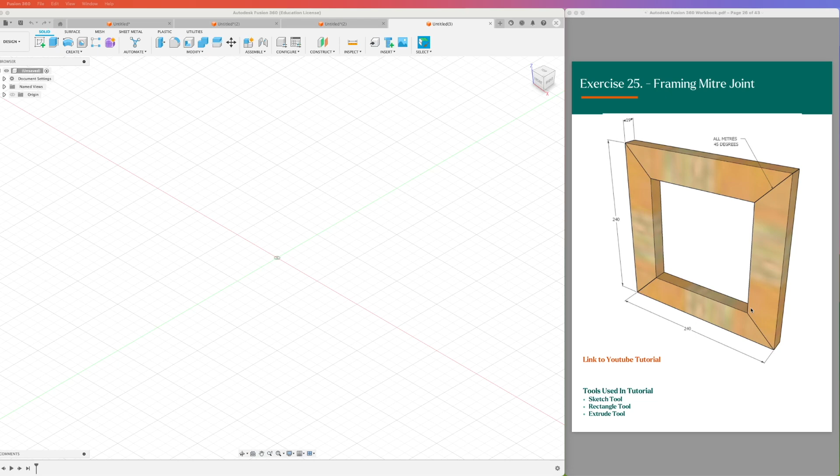Okay, so our framing miter joint. What we're going to do is just draw one piece and then copy it 4 times to make our 4 sides. Then we're going to assemble them back together. So to do that, let's go in and draw one piece.

So we're just going to draw a rectangle. Our overall rectangle is going to be 240 by, let's call him 50, there's no dimension. And then we need our lines at 45 degrees. So there's 45. This is actually going to be 90 degrees.

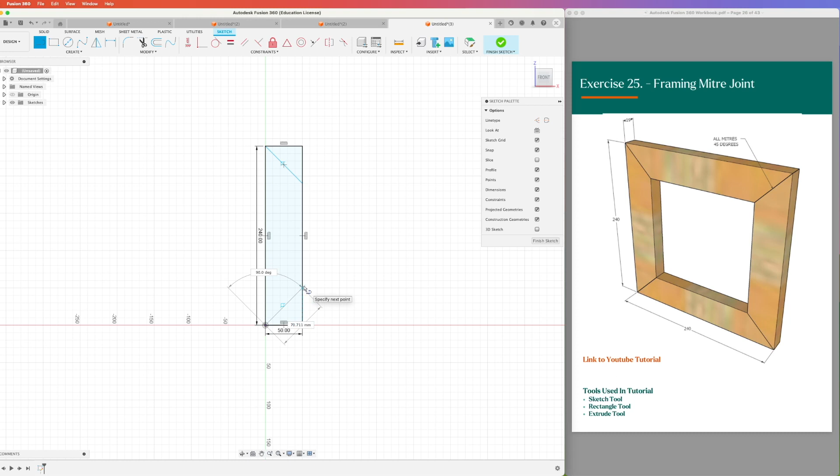All right, so there's our first piece. We can extrude that part there, and we're coming out 19. So we have our one piece.

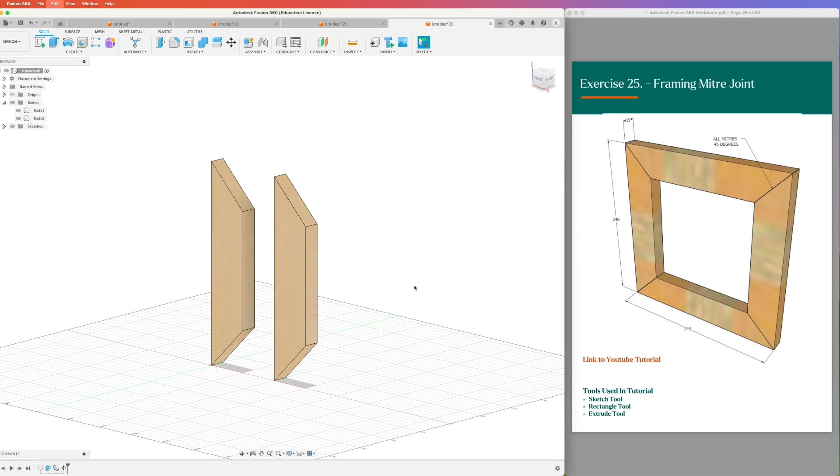So what I'm going to do is copy and paste. I'll go Command V and just move him out so I can see him. Command V, click OK, and Command V. There's my 4 pieces. Now, if I want to assemble these back together, I have to turn them into components.

So I'm going to right click and go create component, create component, create component, and create component.

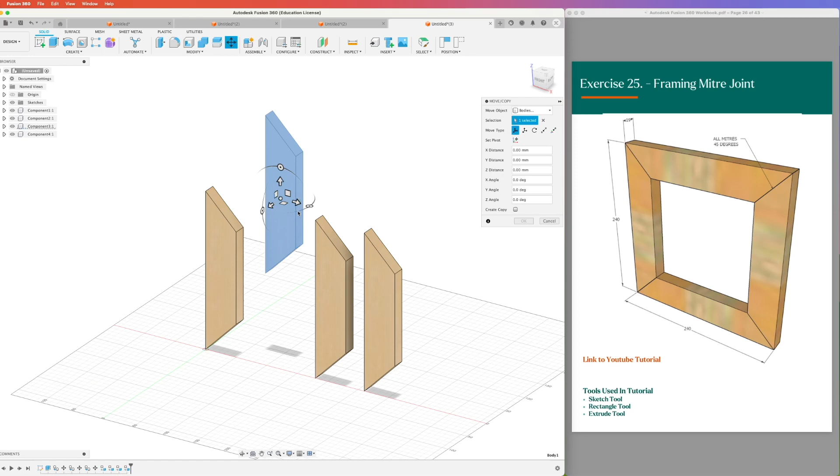Now, what I find easy sometimes is to try and move them around a little bit so that they're kind of close. So if I just rotate that around 90 degrees, I'm going to drag this piece out here somewhere. I'm going to rotate him as well, using move or copy, free move, click on my piece, then rotate him 90 degrees. And then do the same with this piece, but this time we're going around this way, 180 degrees. So they're kind of close to where they need to be, which just helps us when we do our joints.

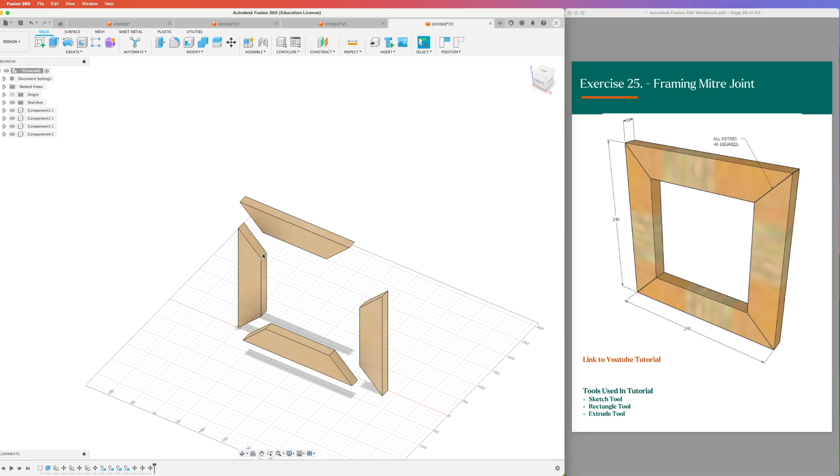So we've got components. We can join them together, but we need to ground a piece first. So if I grab my first piece, my first component, right click and click ground, now he won't move around. The rest can still move, but he's stuck. So as we start joining, they won't be able to move.

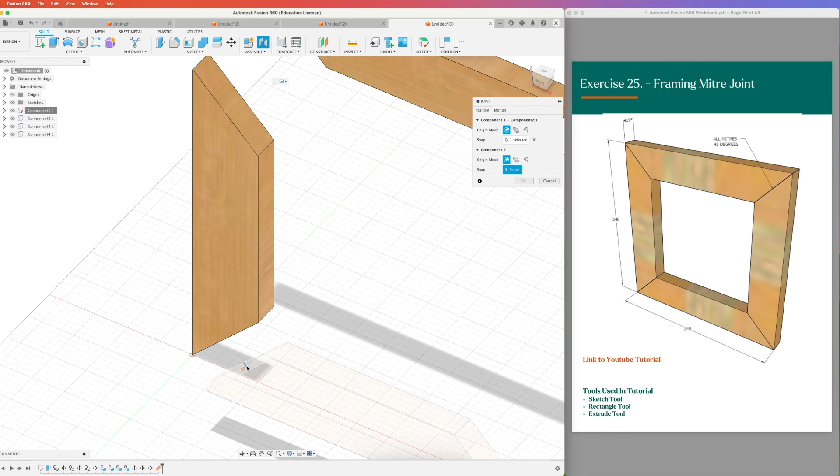So I'm going to start with our first piece here. What this does is it shows you the axes and which way they're facing, and we're going to choose 2 points to line up those axes on. So I'm going to choose the middle of my face there. I'm going to rotate around and choose the middle of this face. And you can see the blues coming down and out, so it should just slot straight in there.

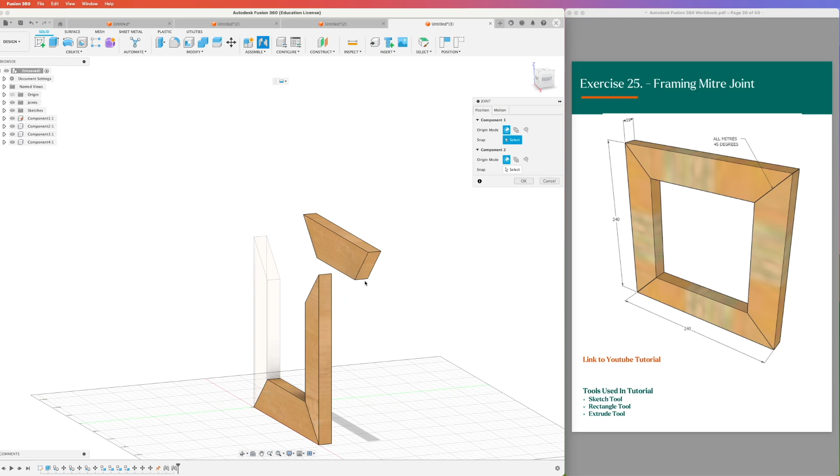I'm going to do the same with the other one. Rotate around. And I'm going to do the same with the last one. So moving them and rotating them before you join them makes this process a lot easier.

So there we have our framing miter joint all completed. Just be careful because you have to copy and paste them as bodies first and then turn them into components. Otherwise, they're all linked together.